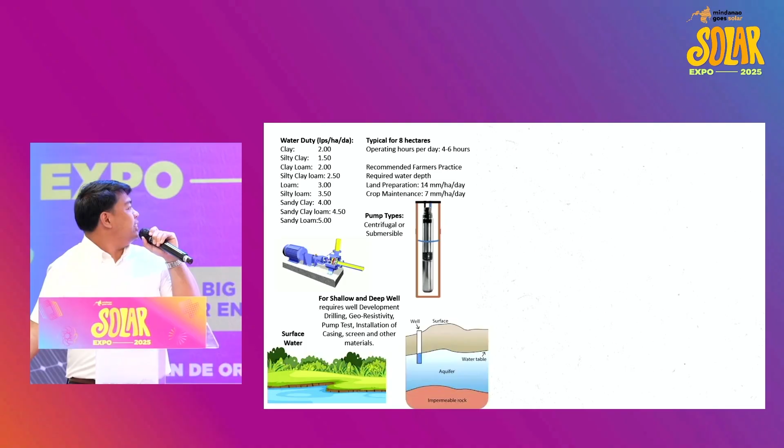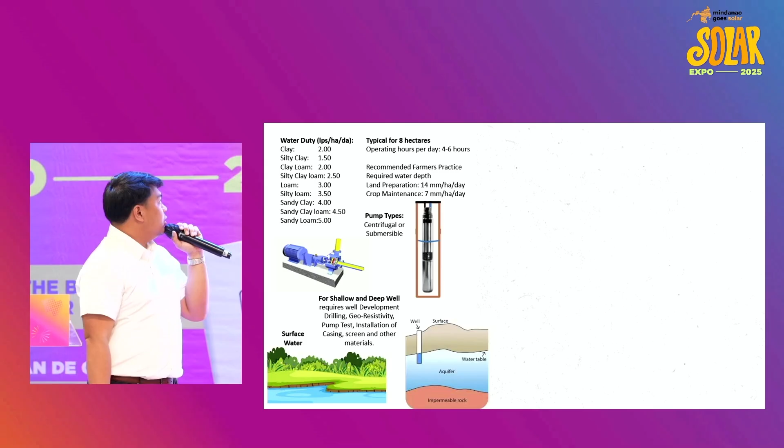When we design for irrigation systems, the first thing we consider is the water needed for the land to be irrigated. Typical for 8 hectares, operating hours are 4 to 6 hours when we talk about solar.

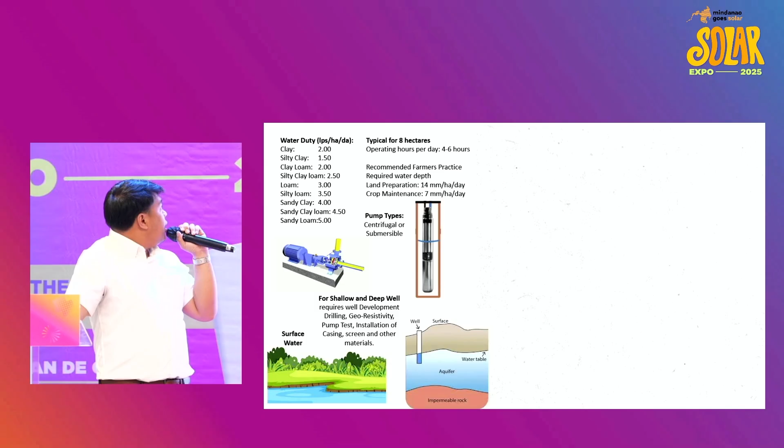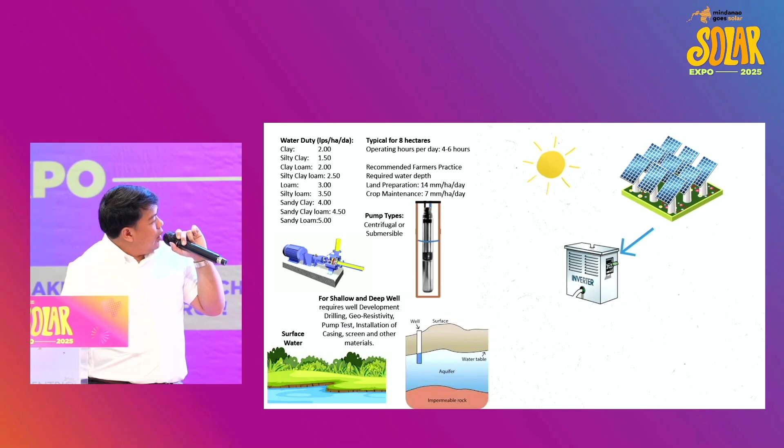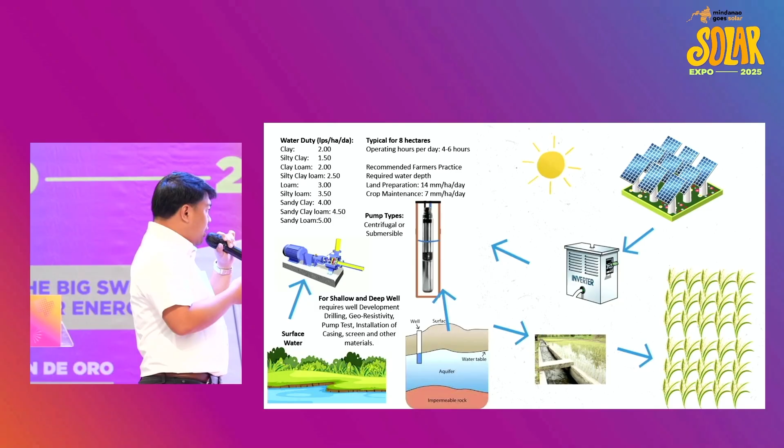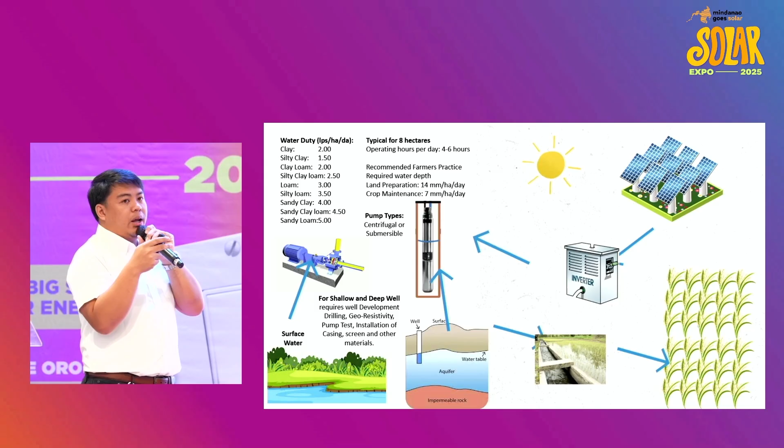In connection to this, we use two types of pumps - the centrifugal pump and the submersible pump. These pumps are powered by our solar panels through our inverter. The inverter powers the control, converting the power to power up our pump. The pump sucks out the water, depending on whether it's surface water or underground water, and we deliver it through the canals toward our rice fields.

Next, inventory of solar powered pump irrigation in Region 10. As you can see, these systems exist in Region 10 and not just in Region 10 but nationwide in NIA - 82 completed solar irrigation projects as of March 15, 2024.

It was very critical to implement solar, especially during El Nino when there was very little rain. So in NIA, we expedited the solar pump as a mitigation, because without rain, the rivers became very low, the water level dropped, making it hard to extract water in some areas that we divert toward lowland areas. That is why in some areas we placed solar pumps to mitigate and augment the lack of water in their rice fields.

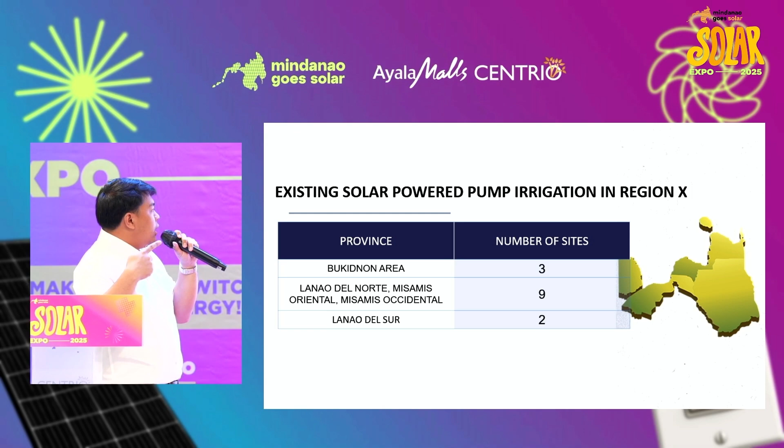So here, in Northern Mindanao, since 2022, we have 3 solar sites in Bukidnon area, and here in Lanao del Norte, Misamis Oriental, and Misamis Occidental, we have 9 sites, and also in Lanao del Sur, because in NIA Region 10, we included the Lanao del Sur province under Region 10 in National Irrigation Administration.

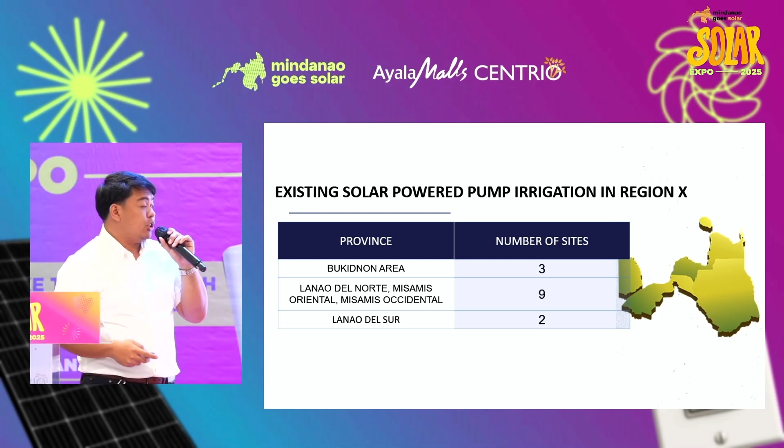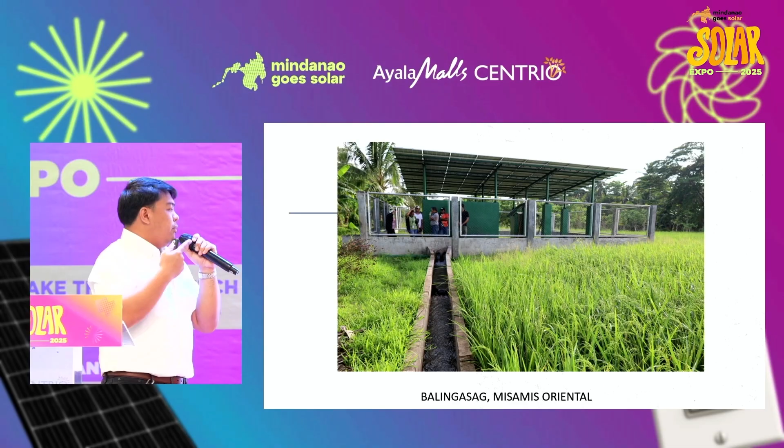And here, I am going to show you one of the testimonies of one of our farmers.

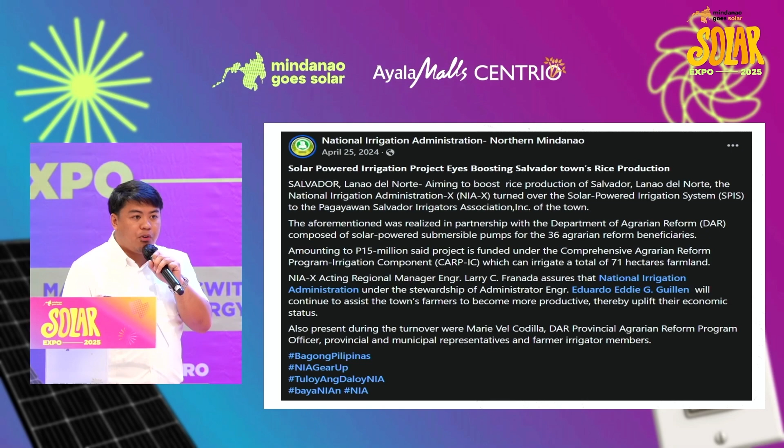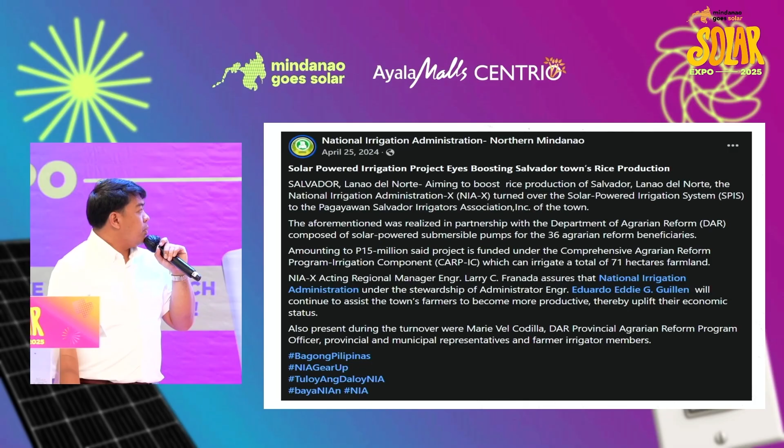So here we have also on our Facebook page, NIA Northern Mindanao, we posted and documented one of our projects in Salvador, Lanao del Norte, aiming to boost rice production. We turned over the solar irrigation project to the Pagayawan Salvador Irrigators Association, in partnership with DAR, the Department of Agrarian Reform. This pump is for 36 agrarian reform beneficiaries, amounting to a 15 million peso project funded under the Comprehensive Agrarian Reform Program, which can irrigate a total of 71 hectares of farmland.

This was under the leadership of our regional manager, Engineer Larry C. Franada. It is located in Lanao del Norte, Salvador. This event was the turnover of the project to our Irrigators Association.

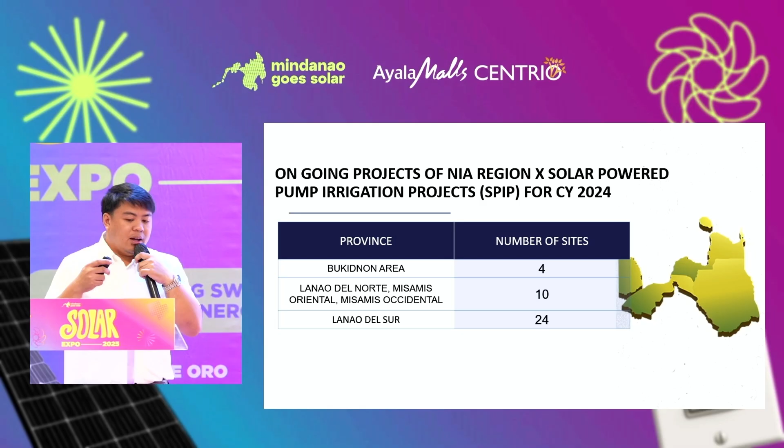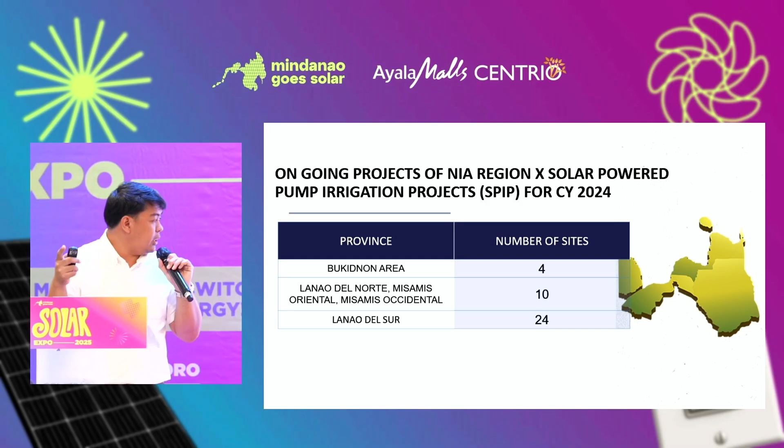And we are not stopping, NIA is not stopping in solar irrigation projects. Now we have ongoing projects of NIA for CY 2024. We have 4 in the Bukidnon area, and around Lanao del Norte, Misamis Oriental, Misamis Occidental, we have 10 sites. And also in Lanao del Sur, we have 24 ongoing project sites.

And lastly, I'm going to end my presentation with another testimony from one of our farmers from Balingasag.

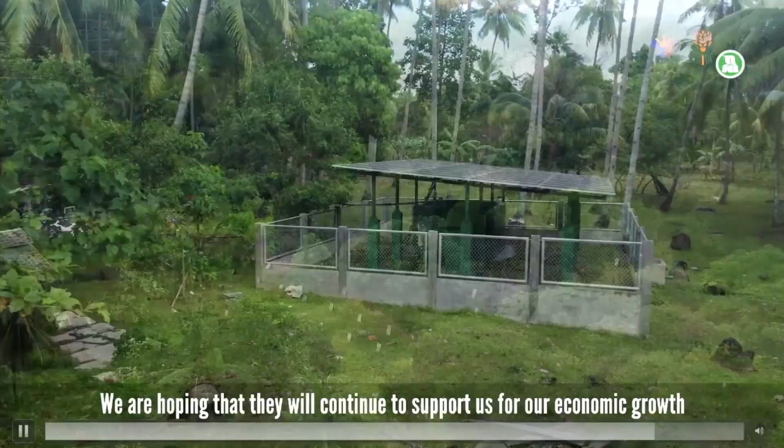But I would like to thank you for listening and appreciating. I hope you appreciated and witnessed how solar helps our farmers, not just in residential areas, but we, the government, are helping our farmers through the advancement of technology. We use this for agricultural production and to help secure food security in our country. So again, this is not just in Region 10, Northern Mindanao, but nationwide, and you have just witnessed a few examples of the thankfulness of our farmers, and to everyone who has listened to my voice, I would like to thank you.